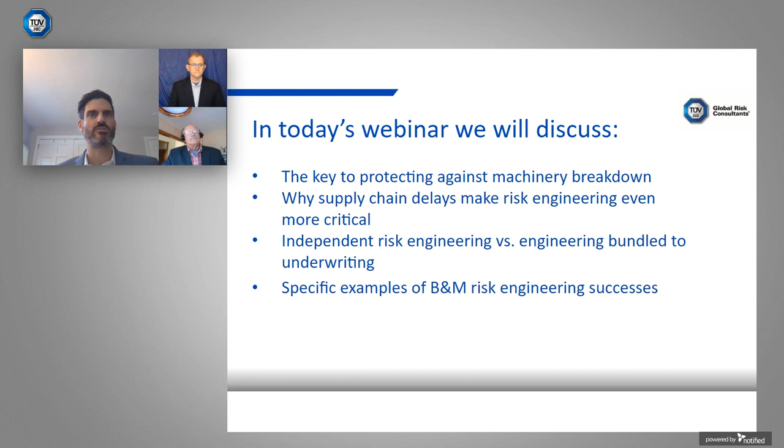So thanks, guys, for doing this, and let's go to our first question. So what are the considerations when discussing machinery breakdown? Who wants to take that one? I'll start off first, Jared.

When it comes to boiler machinery breakdown risk and exposures, there's four loss prevention considerations we have to take into account: property damage, business interruption, contamination, and consequential damages. Bryce, you want to fill us in on property damage?

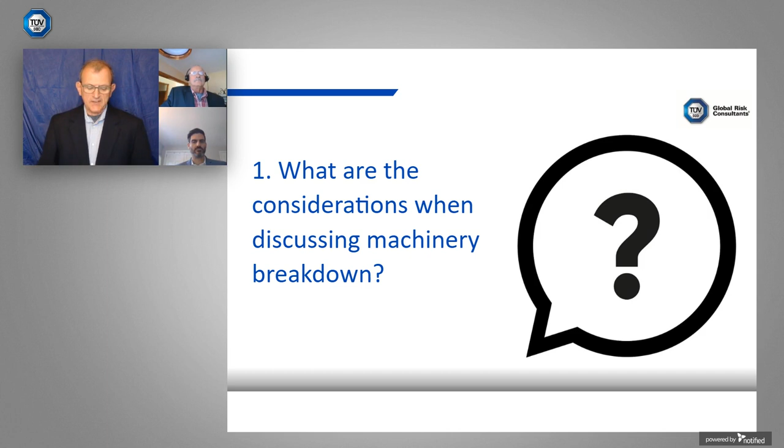Certainly. Thanks, Paul. So what we're talking about here is physical damage to equipment. For most people, when asked about property damage, they think about their home or some other personal possession like a car or a boat. In the boiler and machinery world, property damage applies to the equipment on the property, basically what is inside the building envelope. This could be production process related equipment, might be equipment providing a utility service that supports production, or equipment providing control and protective functions.

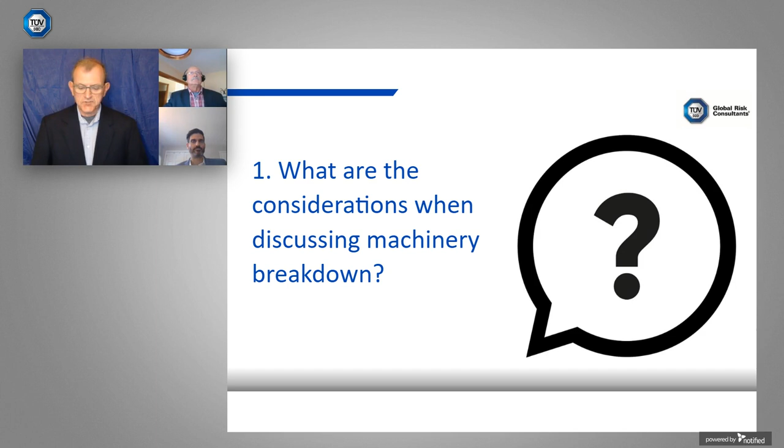Some examples of property damage include rotating equipment. There might be a roll failure in a paper machine, maybe a single dryer can, maybe the entire Yankee dryer. Or it could be a motor failure in a dust collector blower or in a hydraulic power plant. Electrical equipment, it might be damage to the electrical distribution network, or a computer server could fail, resulting in a loss of control programming. And mechanical could be a collapse of a cooling tower that would disable your cooling system, or a boiler accident resulting in a loss of steam or hot water for your process.

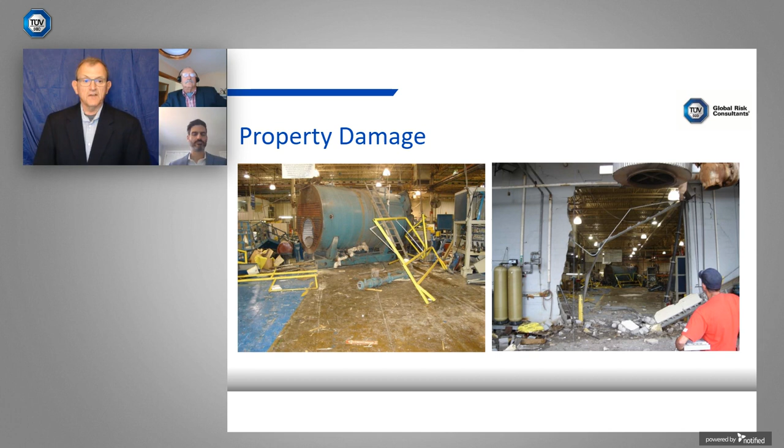Paul, you want to take the next one? Sure. With business interruption, most people are familiar with property perils such as fire, explosion, windstorms. These type of events can devastate a business just with physical damage, but almost always will end up with some type of business interruption.

But when it comes to boiler machinery assets, things as Bryce said, mechanical breakdown, such things as a centrifuge explosion, you could have a cracked rotor or a shaft, a turbine overspeed failure, gearbox fails. With electrical equipment, you can have things like arcing in switchgear, transformers can explode, or motor insulation can fail.

Steam boilers, you have things like cracked welds, low water condition where you damage the tubes, melt them, collapse the furnace, or the most catastrophic event you can have with a steam boiler is a boiler explosion, which will cause a significant amount of building damage, and anything around that boiler will be damaged—or hopefully there won't be any people involved, so we won't have to worry about personal injury.

But these assets are vital to the production flow and the continuation of your business. So failures of assets like this will almost always end up in production and process interruptions. So our questions are, how well is your business prepared to sustain one of these events? Are there installed spares available?

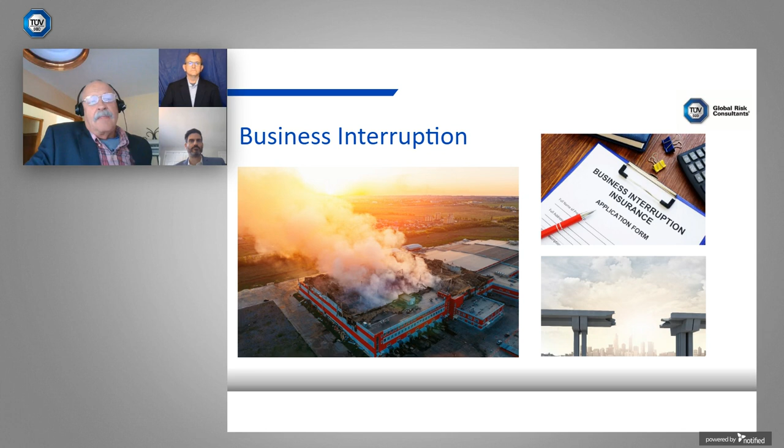Sure can. Thanks, Paul. So contamination losses occur when an intermediate or final product does not meet the quality requirements of internal or external customers. Maybe they don't meet the standards defined by an industry or government entities such as the Food and Drug Administration or the Environmental Protection Agency.

Some examples of contamination losses include food contamination by a processed chemical such as hexane, or maybe ammonia, or quite possibly a lubricating fluid. Food contamination can also happen with biologics, such as E. coli, Salmonella, or Listeria, due to a process or problem in the process.

There could also be an incorrect blend of ingredients due to a failure of automated process control. This could be for metals, paper, food, or even chemical.

And the last thing where you might see contamination is in the wastewater stream that's leaving the facility. And that's where the EPA would come in.

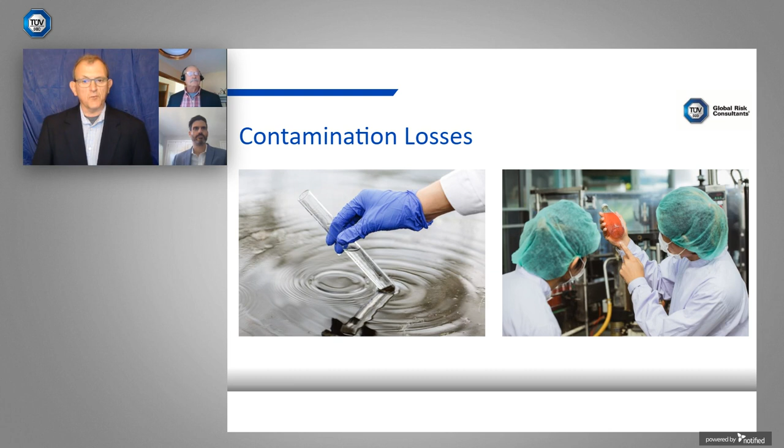And Paul, I think you're going to take care of the consequential damage. Yep. So consequential damage, what that is if your location would sustain a loss to either your incoming utility power, could be fuel, could be heat, steam, refrigeration, things along that line, one of your services coming in.

So the questions that we're going to ask and things we're going to try to research a little bit while we're at your facility is, do you have product under refrigeration? Is it in storage? Is it in process? How much is it? What happens to it? If you lose refrigeration, what happens to that product? Can you reclaim it, or is it spoiled? That has to be disposed of.

The other thing you can look for is things like catalysts. So does that catalyst need to be heated, cooled? If you have a catalyst inside a reactor, if you lose the heating or the cooling, does the whole batch end up solidifying that you end up having to go into extraordinary means to remove that catalyst, get in there with jackhammers or things like that to get it out of there?

It will cost the company a lot more money to remove the catalyst or the product. So the thing is, how much of the product is at risk? How much of it can be reclaimed?

And then when you look at spoilage, who determines that product's spoiled? Is it an in-house quality assurance person, or it could be some jurisdictional authority like the USDA or state jurisdictional authority. Those are the kinds of things we look for in the information we gather.

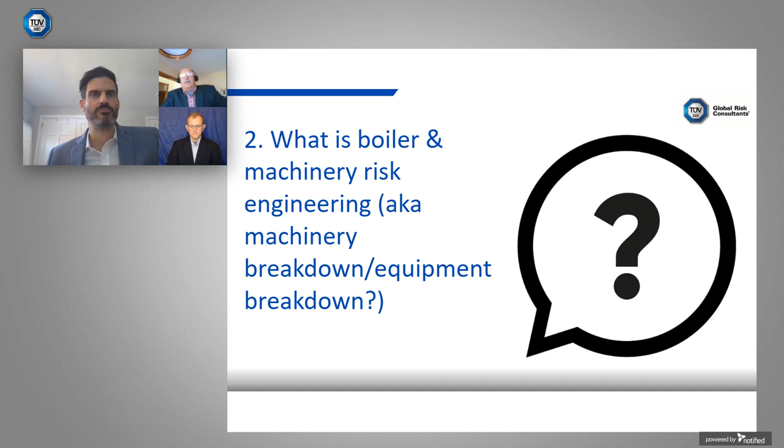Sure. Many people are very familiar with property evaluations where they're identifying potential loss from a fire, natural hazards, things like floods, hailstorms, hurricanes, earthquakes, just to name a few.

But boiler machinery focuses on the risk and exposures of the assets at the location, like Bryce mentioned earlier. The assets, things like boilers, pressure vessels, piping systems, electrical assets like your transformers, motors, switchgear, and your mechanical assets, things like pumps, compressors, production machinery.

So what we do is we try to gather the information and develop the scenarios as part of our evaluations. So, for instance, what's the asset? How is it installed? Does it meet industry standards? Is it best practices? Are there available applicable codes or standards that govern the installation of the equipment?

What are the operating procedures and practices? Do they meet industry standards and best practices? Are you operating that machinery as it was designed, or for the best way to meet your practice? And then what's your maintenance philosophy?

It could be corrective or proactive. If you're just doing corrective maintenance as things break down, you are reacting to it, and you're not a good risk as somebody who would be proactive. So what's your level of predictive and preventive maintenance? Those are the kind we're trying to develop that information.

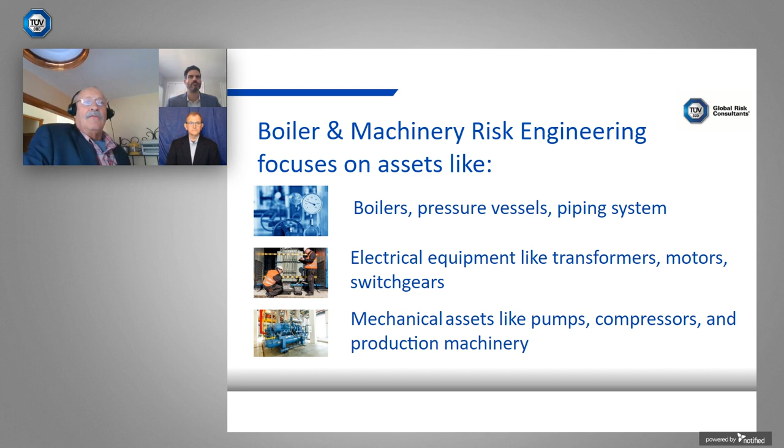So we'll review it and evaluate your operations and your maintenance, again, going back to measuring the risk and exposures. So the other thing, I probably sound like I'm repeating myself, but again, we collaborate with our clients to offer recommendations to control the exposures and the risks.

Bryce? Jared. Yeah, sure. I wasn't sure if Bryce was going to chime in there. That was a great answer, though.

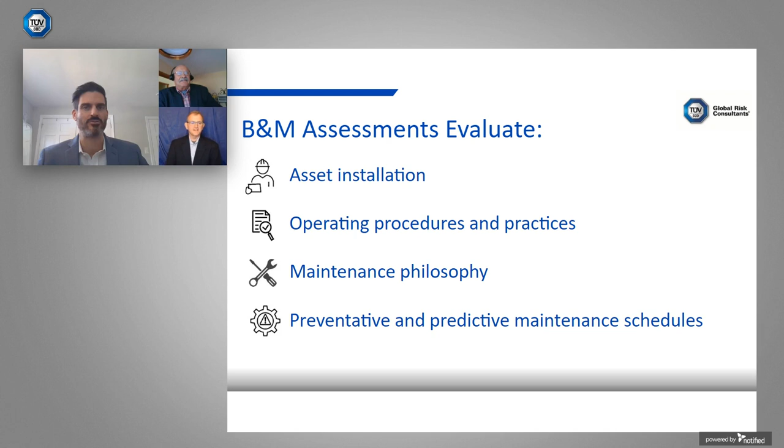Paul, thank you. Let's go to the next question. So, we all know about the supply chain delays that we're having today. So how do supply chain delays affect the need for boiler machinery risk engineering?

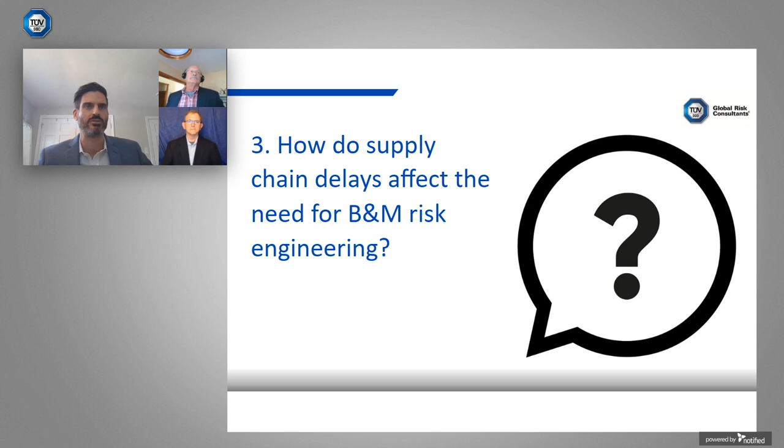Yeah, okay, I'll take this one. So let's consider the supply chain. For any customer, there's multiple facets they have to consider. First would be the supply chain for the raw materials they're receiving to make their product. Then on the going out of the business, you have the outlet for the product. It might be further manufacturing, either at a sister facility or a totally different business who's purchasing their product, or they might go directly to the marketplace with their product.

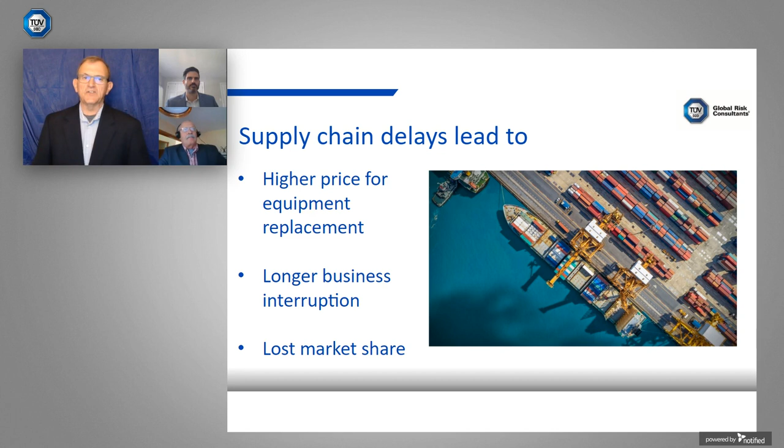And the last thing that we're looking at with respect to the supply chain is that for the spares or replacement parts. Now, a longer supply chain delay will result in a longer business interruption loss event for those three things that I just talked about. It may also result in higher costs for parts and materials due to competition for those parts and materials that are available. And lastly, the longer business interruption lasts, it can lead to an increase of loss of market share. And the more market share that a business loses, it can be difficult or impossible to recover from that.

So the impact of longer lead times can be mitigated by assessing the lead times of raw materials and increasing the buffer inventories that you have on hand. Also assessing critical equipment for increased predictive and preventive maintenance. Additionally, you can do more frequent updating of the contingency plan for current lead times of critical spares.

And also, you can improve the availability of spare parts by having either on-site spares. If you're part of a larger company with many facilities that use one or two common items, you could have a network spare. And lastly, you can have agreements with other supply houses for certain equipment, such as a larger horsepower motor like 500 or 1,000 horsepower. You may not want to have or bear the cost of having that in your own facility, but you'll have an agreement with the supply house to maintain that motor on their shelf, and it is basically reserved for you.

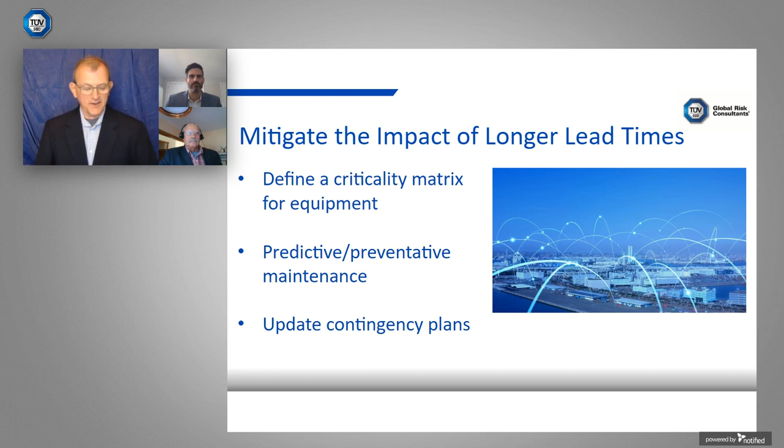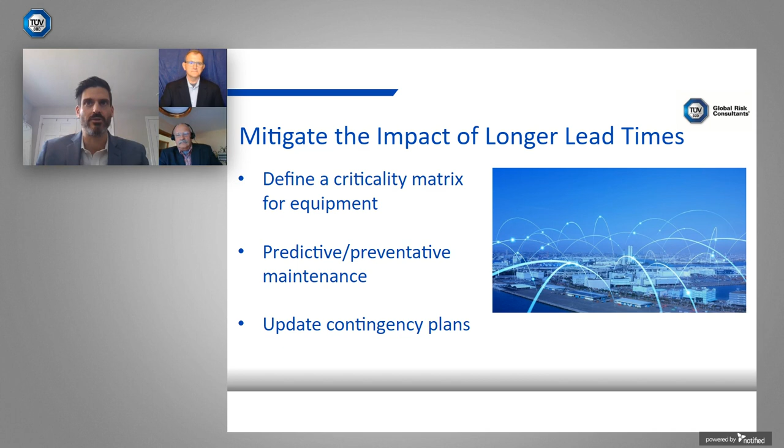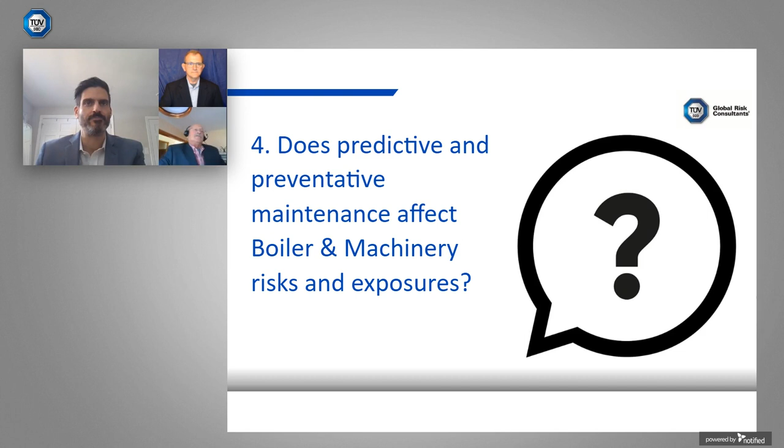So does predictive and preventative maintenance affect boiler machinery risks and exposures? Yeah, I'll take that one. Absolutely, it does. When you're using predictive and preventive maintenance to monitor the health of your mechanical and electrical assets, you help control the risks and exposures.

When you look at preventive maintenance, that's a time-based evolution where you're looking at your asset on a weekly, monthly, annual, semi-annual basis. When you look at predictive maintenance, that's where you're using technology to monitor the health of your asset. A lot of people also refer to this as condition-based maintenance.

So some of the more well-known predictive maintenance technologies out there, you have things like vibration, thermography, lube oil analysis, transformer fluid analysis, or even testing the solid insulation of transformers. A couple other things like balancing, alignment, criticality analysis, business continuity planning. You can go on for a while with the well-known ones.

Some other predictive maintenance technologies that you normally find at a higher rating facility include non-destructive examination. Are you using ultrasound, dye-penetrant, magnetic particle? Are you x-raying piping and pressure vessels to look for cracks and degradation? Things like airborne ultrasound or acoustic emissions let you hear your machines at a higher level, where normally we can't hear them, but with this instrument you can actually hear the ball bearings rolling around in bearings. Some people use it for air leaks, steam leaks, things along that line.

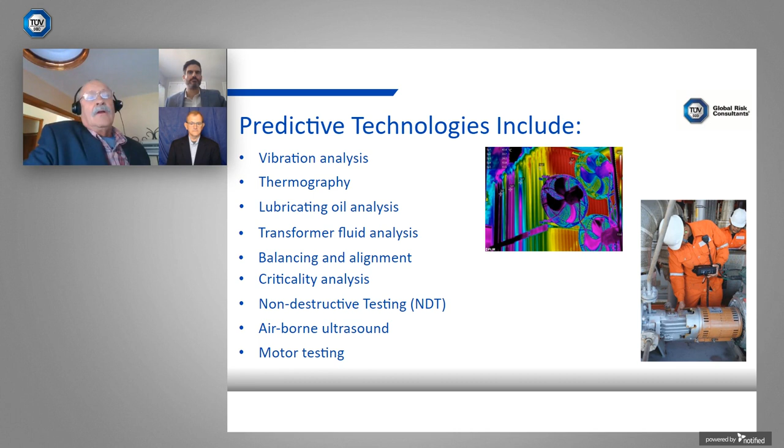Yeah, motor testing. Some of the newer technologies out there are things like motion amplification cameras. It's a new technology where you use a camera to measure and quantify the structural analysis of your assets. I've seen it used several times - you could have ductwork with the structure around it that holds the ductwork up, and that structure is moving, but you don't know it because you can't see it. But with one of these cameras, it enhances what you see, and you can actually see that thing shaking, which will end up degrading the structure and could damage the duct.

Some other things you can run into are torque monitoring - again, we're using strain gauges to measure how much a shaft will twist. And then you can also use artificial intelligence, where you measure the operating parameters and collect data from your asset, put it through the software, and it will tell you, based on the operating parameters and the data, what's going on with that machine. Is it running normal? Or do you have something going on that's just starting that could end up being a failure?

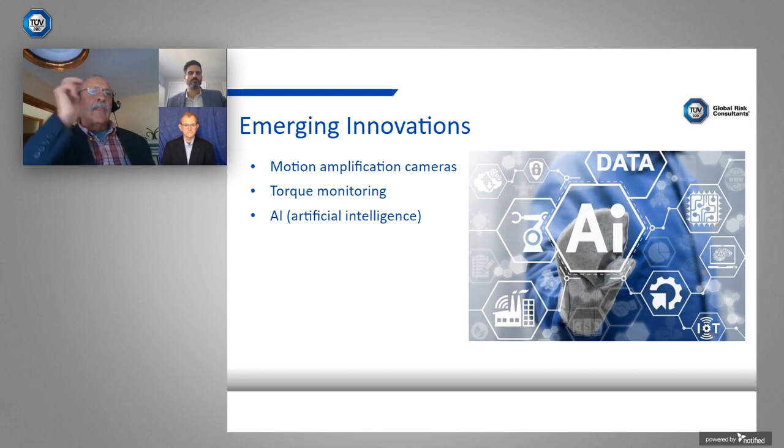So the results of using this type of equipment, if you set up a comprehensive predictive maintenance program, things you can realize are improved equipment reliability. You can increase the life of your asset. You'll increase your uptime and utilization of your equipment. You can detect problems early and plan on corrective action. You're going to decrease your downtime, control your costs, and then, as we always come back to, you'll know your risk and exposures and be able to control them.

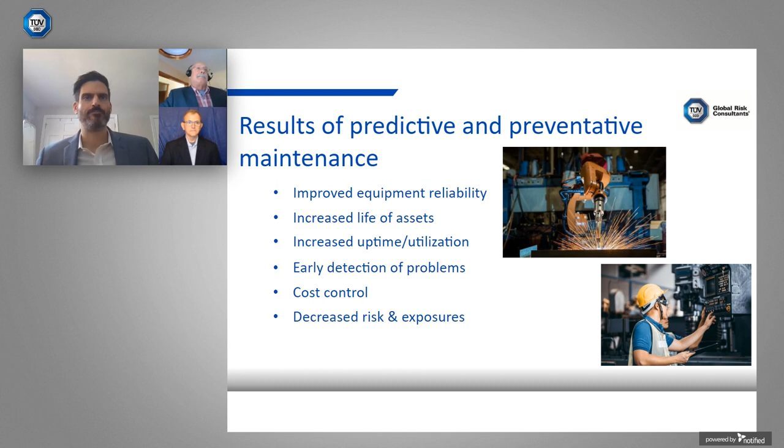So we've talked about the concepts here, let's get into some concrete examples. Can you provide some case studies of successful B&M engineering? Sure. Who wants to go first? I'll go first.

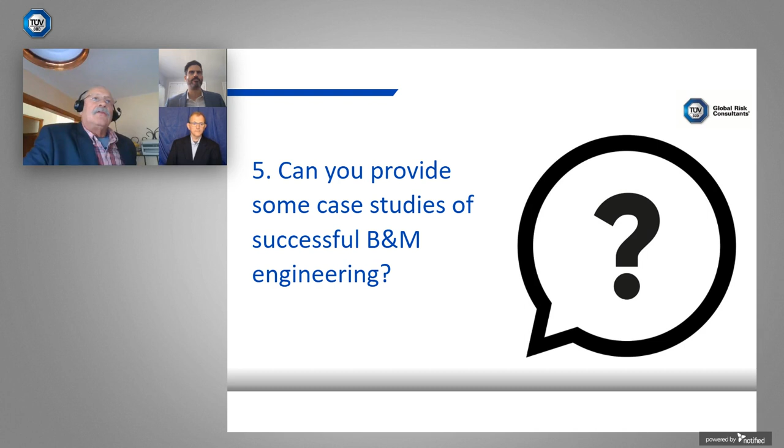Several years ago now, I was inspecting a mid-sized company that manufactured fire and security alarm boxes. They had a lot of stamping equipment, some welding, painting, things along that line. What happened is the main electrical switchgear had a 3,000 amp fuse disconnect as a main circuit interrupter, and then the rest of the distribution was molded case circuit breakers.

So what I found was the location wasn't doing any routine maintenance as far as cleaning, inspecting, testing their switchgear, and they weren't doing any thermography either. So I made two recommendations to them: first was to do an infrared thermography inspection, and the second was to take a day to do a site-wide power outage to do the cleaning, inspection, and testing of their switchgear.

After they did the infrared thermography, they found a couple thermal anomalies, nothing major though. But when the contractor came in to clean the switchgear, what he found was that the 3,000 amp fuse disconnect had the contacts fused together. So you weren't going to open that switch no matter what you did, because they were basically welded together. Now, the fuses would have blown to protect the plant if the current going through them exceeded the fuse rating.

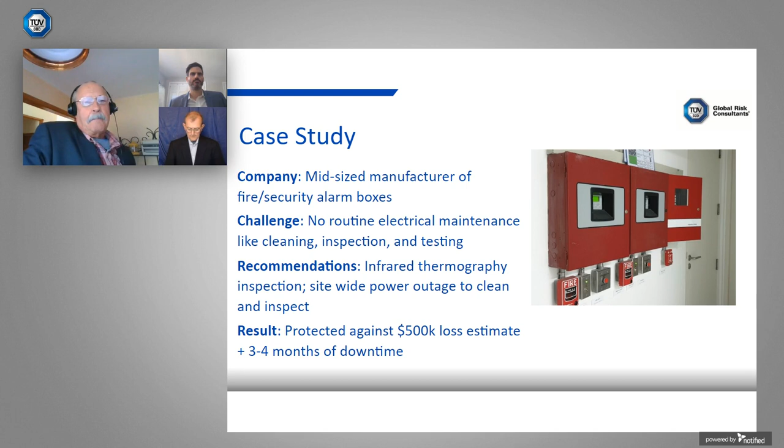Yeah, I sure do, Paul.

So the one thing I'd like to say is that when we're on site performing these assessments, we have an opportunity to provide recommendations that hopefully they'll take care of an issue that we find while we're on site, but it will also create some sort of behavioral change that will have a long-term benefit for that company.

So during an assessment visit to a roof panel manufacturer, I observed that they were performing annual oil changes on 2 gearboxes that are on their main production line. Unfortunately, they were not assessing the condition of the oil, and they thought they were doing a great job, which in thinking from years past, yes, time-based PMs, they were doing a great job. But they were also missing an opportunity here.

And the opportunity was to perform an analysis of the oil before they drained it out of the gearboxes. When they did the analysis, what they found in one of the gearboxes is that they had an unusual amount of wear particles inside. And as it turned out, these wear particles were coming from one of the bearings.

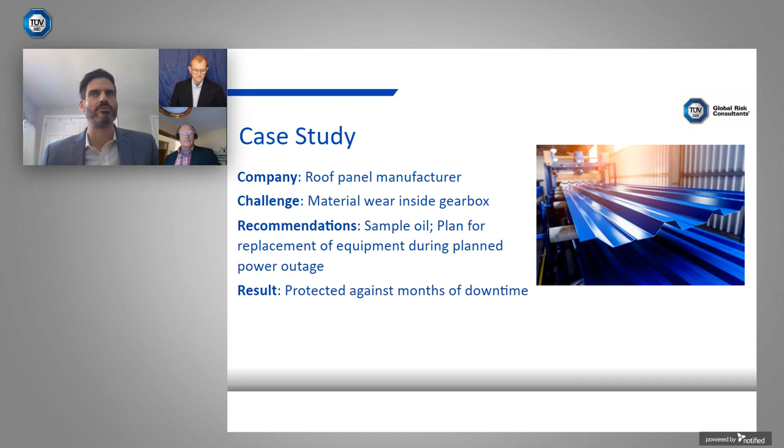So without further ado, let's get to it. How do risk assessments by independent consultants differ from those bundled with underwriting?

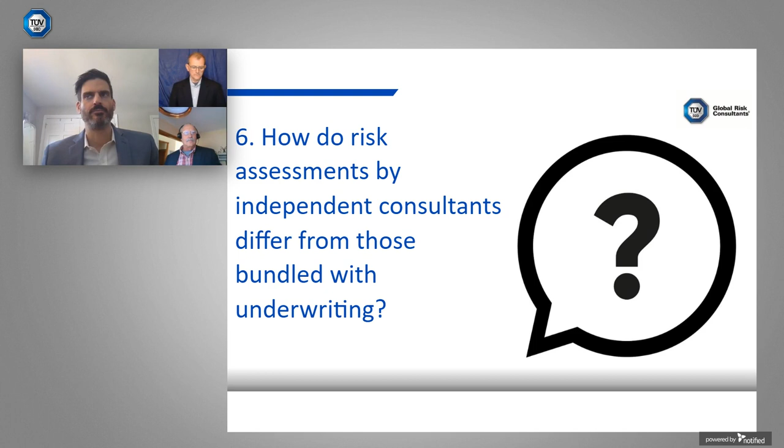Jared, I'll take this one. So in most cases, our customer is the business we are assessing. However, there are times where the customer might be a broker or an insurance carrier who does not have the in-house risk engineering staff or expertise to perform these assessments. Now, the assessments performed by independent consultants usually start at $1, not at the deductible set by the insurance company. This allows us to identify risks and risk reduction strategies for losses that don't reach the deductible. It can also lower the cost to implement the risk reduction strategies. Therefore, the recommendations or improvements that we develop can have a major financial impact on the business by improving the stability and reliability of operations with a relatively low cost of implementation.

The independent assessments usually are performed by risk consultants who have an experience base across dozens of occupancies. This could include paper mills, printing, food or grain processing facilities, specialty steels, power generation, and maybe even aerospace. When an assessor for an insurance company is doing an assessment, typically the experience of that assessor is driven by the occupancies written by that company's book of business. This could be light manufacturing, maybe office buildings, or healthcare. So the insurance companies might be somewhat limited in their experience base, whereas the independent consultants generally have more experience and have a much broader experience base.

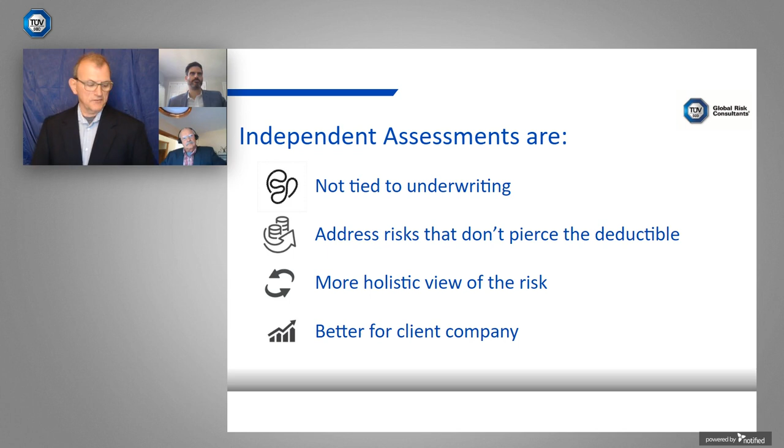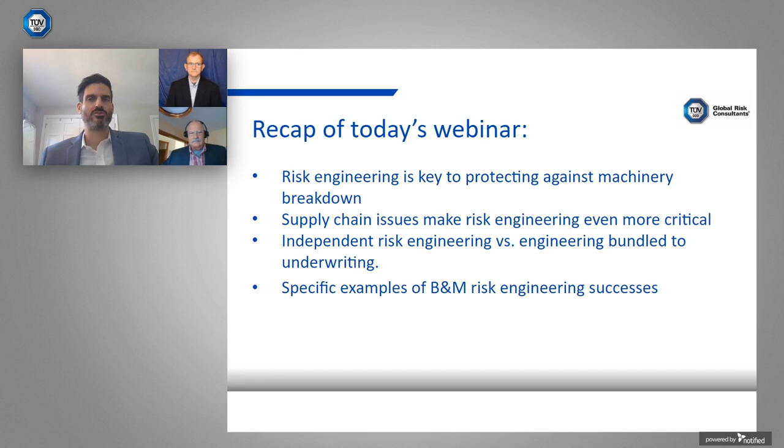Let's do a quick recap of today's webinar before we get into the Q&A questions. What we learned today is: risk engineering is key to protecting against machinery breakdown. Supply chain issues make risk engineering even more critical. Independent risk engineering is superior to the engineering bundled to underwriting, for reasons Bryce just discussed. And we learned about some specific examples of boiler and machinery risk engineering successes, which were really good to hear.